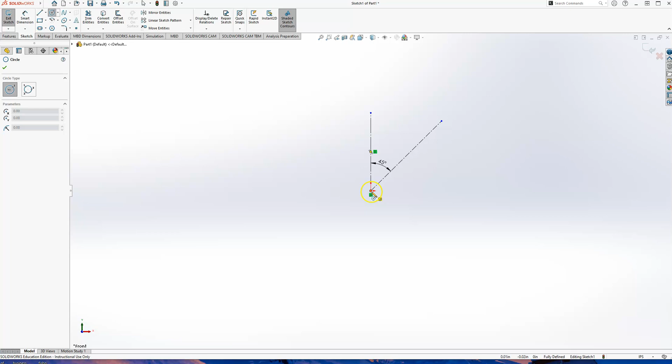So I'm going to go now to the circle tool, and I'm going to create a circle at the origin. I'm going to create a circle at this endpoint, and I'm going to create one out in the middle of nowhere. Okay, so first and foremost, all of them are still undefined.

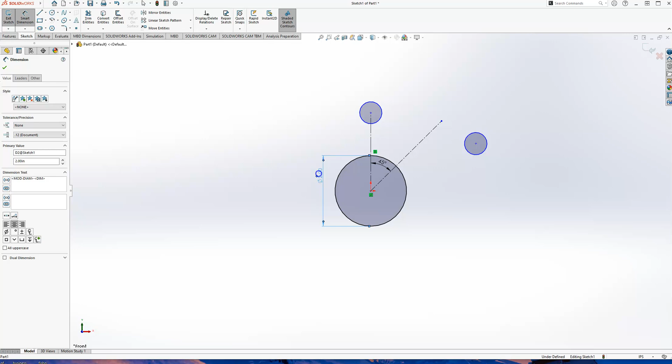This one that lies on the origin is the one that's easiest to define because all it needs is a size dimension. Its location is already locked by X and Y being at the origin. So I can pop a dimension in here, whatever that dimension is. Let's make it 2. Let's make it 1. Whatever that dimension is, that circle becomes fully defined.

If I do the same thing and smart dimension this circle, and accept that, it's still blue. Huh, why is that still blue? It's sitting on that line. That line's fully defined.

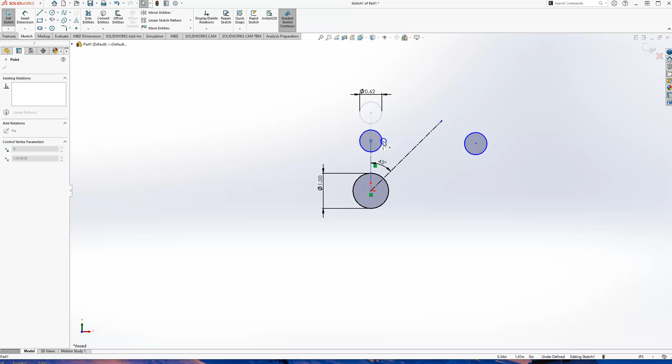So if I grab this center point, I can tell you that it's not really defined. It's locked on the line. If I'm going left and right with my mouse, it's locked horizontally but not vertically. So even though the line is black and it has a known distance, it doesn't have a dimension that's locking that distance.

So if I hit escape here and I go to smart dimension and I go from that endpoint to this origin, and I say I want that to be 2 inches, now we're fully defined. Now what else do I need to do?

I need to lock this circle down, and let's do that with a relationship. So I'm going to go down under this pull down menu. I'm going to go to add relationship, and I'm going to pick on the entities that I want to create a relationship with. I'm going to pick on the center of the circle and the end of that line. I'm going to make those coincident.

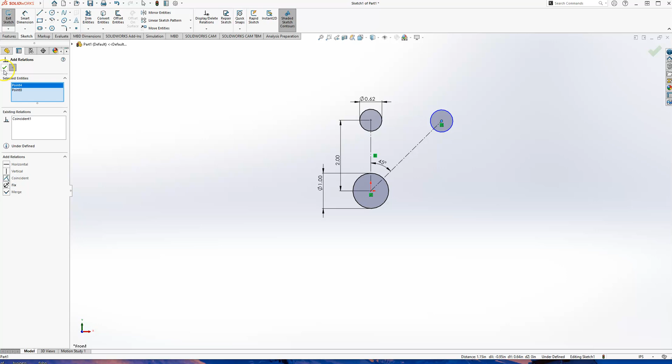It snaps over there. Gosh darn, it is still blue. I'm going to accept the relationship. I'm going to add a smart dimension on there. Oh my gosh, it's still blue.

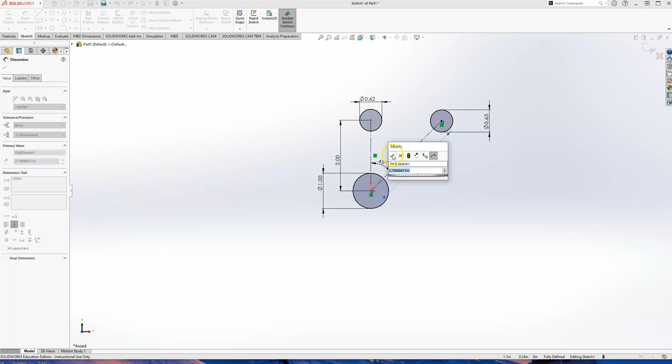I need a distance of this line. So I'm going to smart dimension a distance. Smart dimension, escape key, a distance in there. Don't care what it is, but now that it's there, now we have 3 pieces of geometry that are fully defined.

I also encourage you, it's much like a coordinate system, or like you're out there surveying as a surveyor or civil engineer. Until you got these known points, I wouldn't encourage you to do too much more surveying, until you get to a point where, okay, now I got 3 pieces of geometry that are fully defined.

I can start to add more geometry and define it based on these fully defined items, right? If these circles are all blue, don't draw a bunch of lines tangent to a bunch of blue stuff, or you're going to have a whole bunch of stuff that's underdefined. I'd also encourage you to always go back to what is the best place to lock things down, which is the origin, or maybe that first circle that's tied into the origin.

All right, so I'm going to just go in here. I'm going to create a couple of lines, and I'm going to keep this pretty straightforward here.

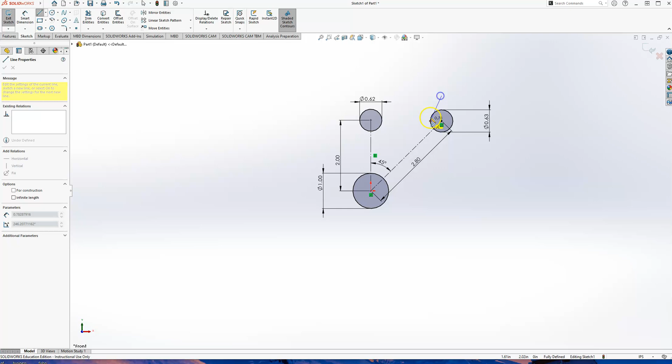I'm going to let you guys go and use this and look it over five times so you know exactly what you're doing. Those lines, completely blue, I purposefully made sure they weren't attached to anything. I'd encourage you not to go in and try to create tangencies by just clicking randomly.

You just oftentimes don't get what you want, okay? So if I'm going to create a tangency now, I can watch it become tangent. I'm going to go to add relationship. I have nothing picked because I hit the escape key earlier. I'm going to pick on this arc, that line, make it tangent, and accept it.

I'm going to wiggle and jiggle and see what happens to this line now that it is, okay, it's definitely tangent. If I move it around, wiggle and jiggle, learn a little bit about what you just did, okay? I'm going to leave this thing sit.

I'm going to go back in, hit the escape key, go back into add relationship, and make sure that point is deselected, so I've got nothing picked as far as entities selected. I'm going to pick this arc, pick this line, and make that tangent. Voila. I can go on and on, but I'd encourage you

to watch, add the relationships, watch them happen. Make sure by wiggling and jiggling that that's the geometric relationship you want, and go from there.

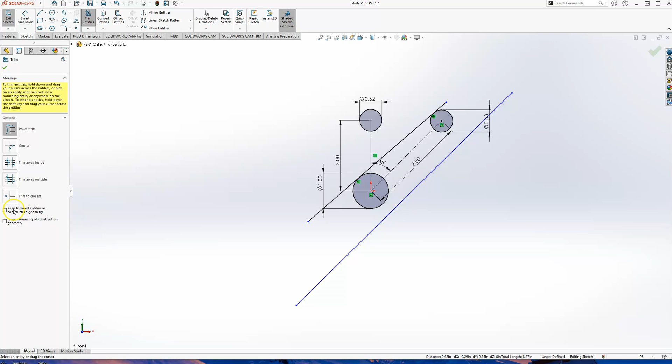And then lastly, I want to hit trimming one more time. There it is. I'm going to pick trim entities. I always pick the bottom one, which is trim to closest. So all I've got to do now is zoom in here and pick on the part of that geometry I want to get rid of.

Right there and right there. Now I can't do anything here yet because I need a couple more tangencies in there, but I'll just add one real quick. Here, here, tangent. Okay, accept that one. Add relation. Here, here, tangent. Sorry, Control Z, edit undo.

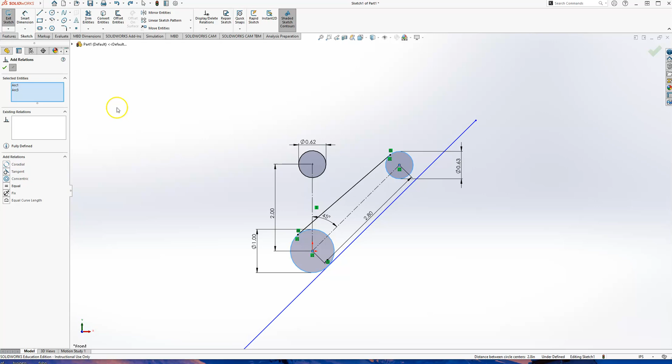I must have hit something wrong. Add relationship. I think I picked that dimension instead. Here it is. Here it is. Tangent. There we go. Accept that one. Go back under the trim command.

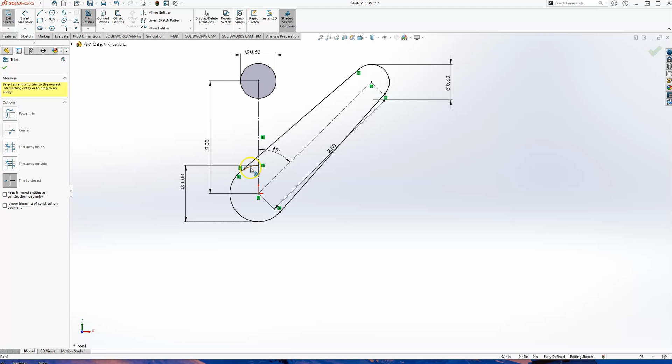Trim, trim, trim, trim, trim, and trim. Now we're getting what we want, right? So that could end up turning into that part that you guys were already asked to draw. Hopefully this helps. Again, make sure that you are locking things down very concretely, sequentially, one thing at a time. Underdefined, okay, now it's fully defined.

Go in, create the relationships you want, leave stuff out there undefined, and force the definition with either dimensions or geometric relationships. I hope this helps.

Keep up the good work. Stay on task as assignments are put out there for you with deadlines. Stay on task with those things. Know that our goal here is for you to understand how to create good sketches, which then create good extrudes, good parametric models. Those models will be

important because they'll end up coming into an assembly. Understand that a big part of this course is that project at the end. You'll do these assignments, you'll be asked to try the CSWA exam for a midterm, and you'll be asked to do that for a final exam, the second part of the CSWA.

But the project itself, most of the points are in that project, and you have to know how to create some parts—8 or 10, 15 different parts that you create, draw up, they go into an assembly and become something. Make sure that's something you're passionate about, something you're excited about. Start thinking about it already, start working towards that already. They don't need to be hard parts, they just need to be good quality three-dimensional content that ends up being 12 to 15 different parts that go into an assembly, and you'll be in really good shape.